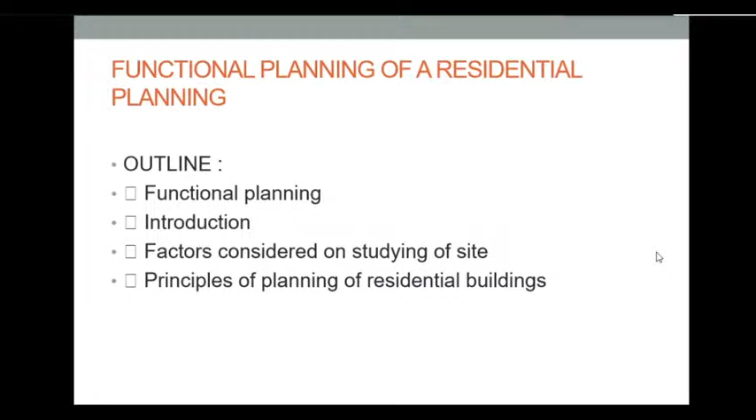So first it will be like a residential building. So first I'll give the functional planning of a residential building, what it covers, as an outline. So functional planning, introduction, factors considered on studying of site, principles of planning residential buildings. So these are the outlines of what we are going to cover today.

So first starting with functional planning, a prerequisite of any type of building. Planning imparts a good environment for living, working and recreation. So a well-planned, efficient and comfortable living environment is required for building up happy, healthy, beautiful, cheerful, peaceful lives. So we all must know how a residence plays an important role in each and everyone's life. It's a space where we rest and everything depends upon it. So our health, our happiness, everything is related to a residence.

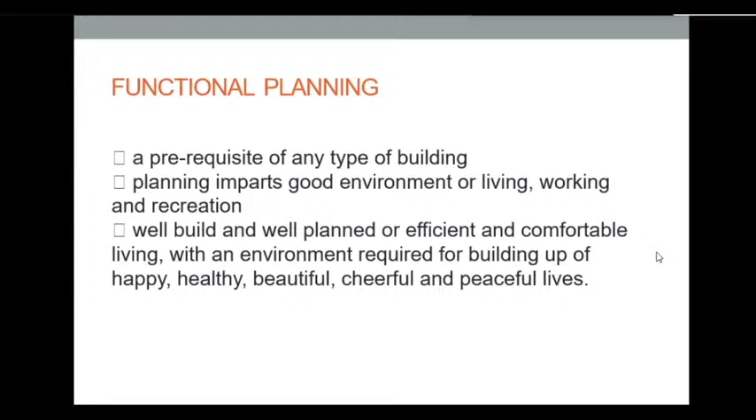So we'll see how planning concepts of a residential building play a very important role in all aspects of life. So first, introduction: planners keep the perspective of interior spaces for better results and economy. Moreover, it correlates the scientific factors of natural resources and Vastu Shastra. Vastu Shastra is to achieve mental and physical comforts of residents. The next thing is one must study the site before planning the site.

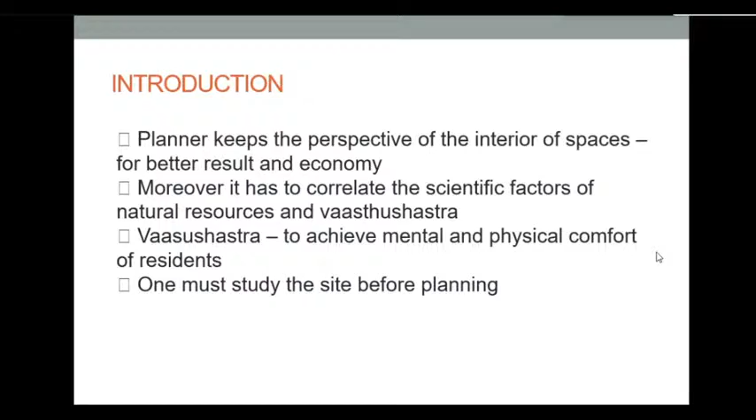Okay. So we'll have a general introduction about Vastu Shastra also. General introduction only, I'm not going deep, just a basic layout of Vastu Shastra so that you'll have a basic knowledge while planning a residence. Vastu Shastra is mainly dependent on your directions: north, south, west, and east. So you can see this is the basic of Vastu Shastra and the basic location of each and every space.

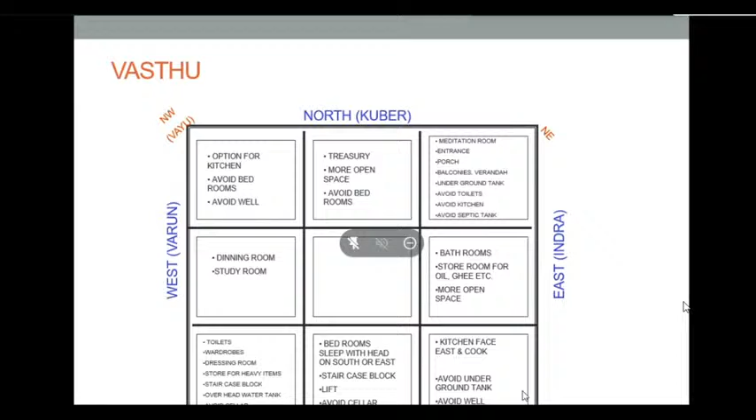Each individual will have a different opinion on Vastu Shastra. So according to me, Vastu Shastra is basically a scientific aspect. Based on the science, there are certain locations where certain spaces should be given. There's a reason behind why a particular space is given. So I'll give a few examples of why these spaces should be given.

Like the southeast corner should always be for the kitchen, and the southwest can be well utilized for a toilet. The reason is the wind direction. Based on the wind direction, southeast or northwest winds prevail in our South Indian context. So if you're cooking in the kitchen, the smoke can travel along with the wind. Or if your toilet is provided in the southwest, the smell can travel along with the wind itself.

So without avoiding your other two spaces, which are perfectly suitable for your resting spaces like bedroom and other lively spaces. Okay, so this is the basic example of Vastu Shastra, and I have given you the basic location of where each space could have been provided.

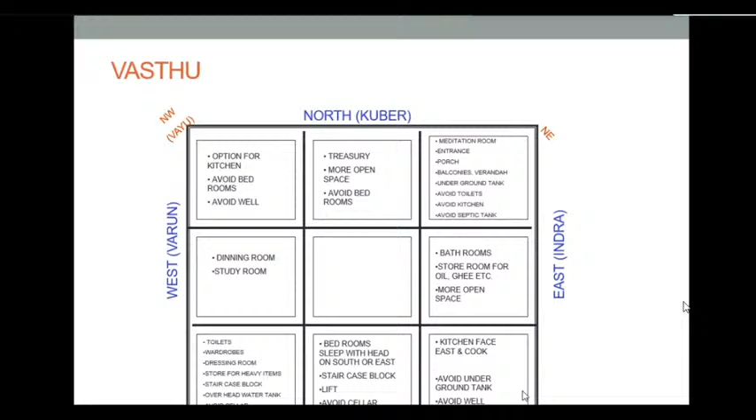So moving on to the next thing, layout of a site. So initially, while starting from a plan, we should always start from the site. So site is considered as the main example from where we should start. So we can say about what is a good site and what is a bad site. Depending upon this Vastu Shastra, also site has been located along with it.

So a good site indicates it should have a proper access and it should have proper neighborhood spaces. So corner sites are considered as good sites only if the location is perfectly suitable. For example, southeast corner site and northwest corner site can be considered, but the southwest corner site should be avoided because of the wind direction and wind pattern.

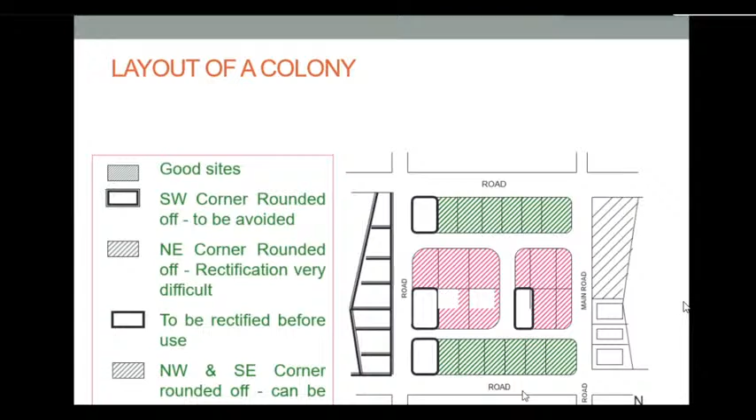Okay. So factors considered on studying of a site. So what you should consider while taking up the site is location of the site, study of the site with respect to the surrounding sites, study of geographical and geological conditions of the site, climatic conditions, survey map, average air direction, and network of road pattern. So these 7 points will be considered majorly when you talk about the site.

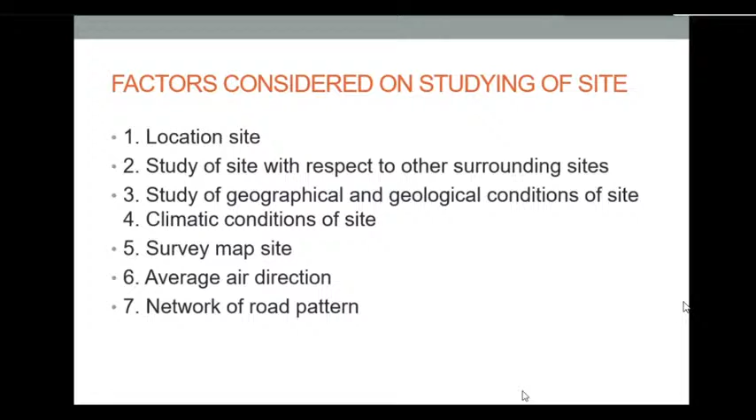The next 5 points: services available today, expected tomorrow. Like what are the services like water, drainage facilities, other things. Then environmental conditions. Is the site perfectly suitable for a residential building? For example, there may be many sites which are located on the outskirts of a city or in the midst of an industrial town or a commercial town, which, considering environmental aspects, are not considered good for a residential building.

Then the 10th point will be mode of transportation. So how well the site is connected through means of transportation. Nowadays, everyone is having a mode of transportation as vehicular transportation, 2-wheelers and 4-wheelers. But there are a few other conditions where common modes of transportation are also considered for accessing a site. So those modes of transportation have to be considered.

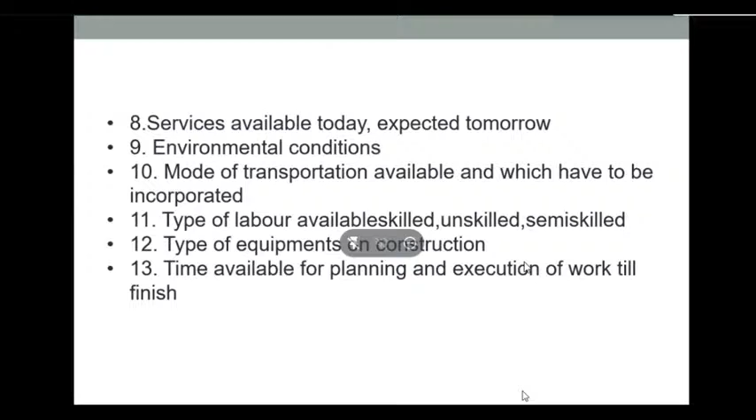Then next to transportation is about the types of labor available. So while you're talking about site, what types of labor are available? Skilled labor or unskilled labor or semi-skilled labor?

So next one is types of equipment for construction. So what equipment is available in the surrounding neighborhood? We have to take up the equipment to the site. How much distance we have to travel to take up the equipment? All these things are to be considered. Then the time available for planning and execution of work till finish. These things will come under project management, which is planning and execution of work.

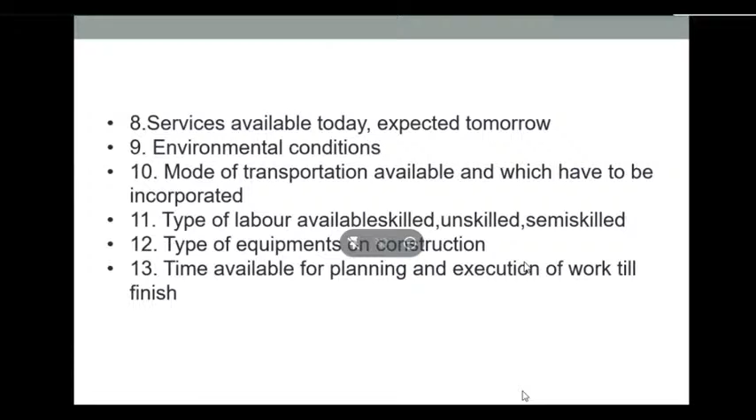So moving on to the next thing: form a circulation diagram to decide the forms of spaces. Form follows function to decide the various dimensions possible. Okay, so talking about the form of spaces, there are different spaces inside a residential building. For example, a kitchen space, a dining space, a living space, a bedroom space, a restroom space. All these are different kinds of interior spaces. So each space has been named on the function it follows.

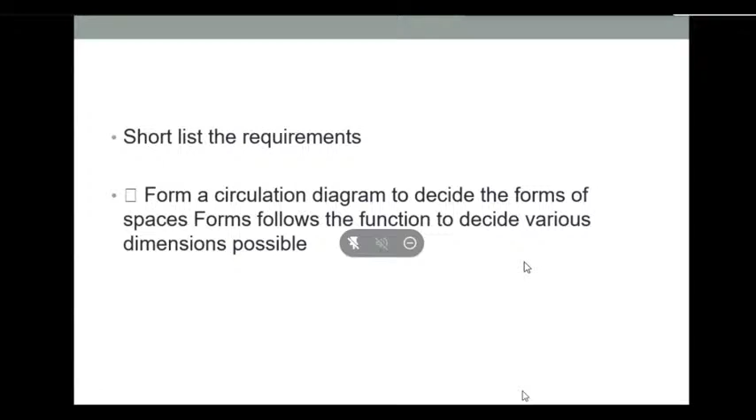So for example, a bedroom is for taking rest, a living room is for lively functions, a dining is for eating, and the kitchen is for cooking. So these are the functions on which the spaces have been designed. So based on this function only, a form of spaces has been followed. So first, we'll be evolving the planning using function. So evolution of bubble diagram to a finished floor plan.

Okay. So first we will be dividing the spaces into 3 zones. So what are the 3 zones? A private zone, a work zone, and a social zone. These are the 3 general zones of activities which will be happening inside a residential space. So what is the function beneath these 3 zones? The private zone will be your bedroom spaces, which will be occupied only by you and your close ones.

Then the workspace will be like a kitchen and dining or a family space. So it is where other people in your family will also be accessing the space, so it will be a semi-privatized space.

Then the third one comes to social spaces. That is your entry, garage, and living space, where third persons, other families or other persons can access, and they will be having an interaction with you. So those spaces are called social spaces. It is more of a non-private space, where other people can come in and have a discussion with you. So it depends upon each one's character and maybe each one's profession.

Then moving on, these aspects will be refined to show zones divided into their rooms and their relationship to one another. So now you can see how the rooms have been connected from each and every space. The third one is redrawn to show size and shape of rooms and traffic between them. Traffic is nothing but the circulation between them.

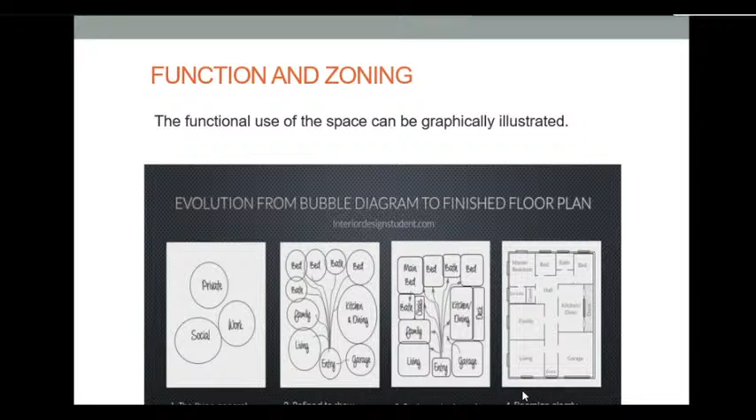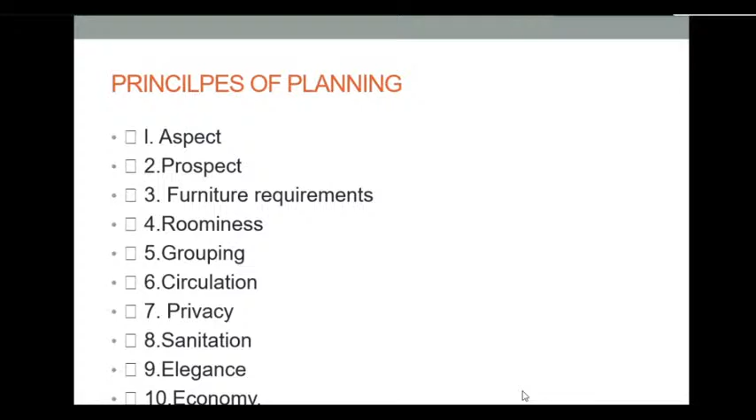Okay. So what are the principles of planning? There are 10 principles of planning, and we'll be seeing each and every principle. So the first principle will be aspect. Aspect means the arrangement of doors and windows in the external walls of the building, which allows the natural gifts of sunshine, air, and scenery.

So based on these aspects only, a space can be designed. An opening may be a door or window: where it is located, how well it is connected with nature, based on the wind movement and based on your sunlight, your space can be designed, and your openings can also be designed based on that. So that is the first thing, called aspect.

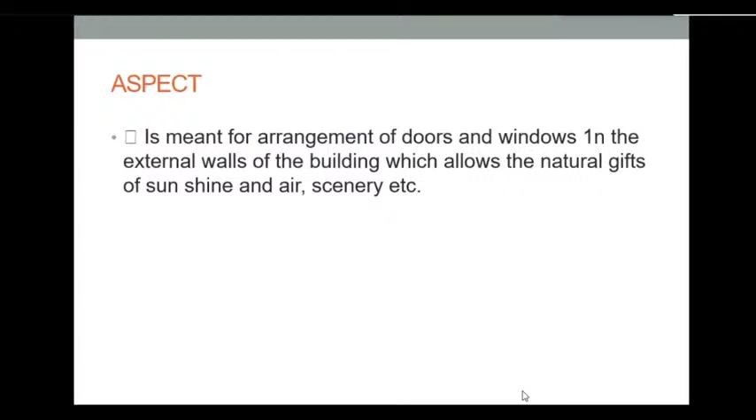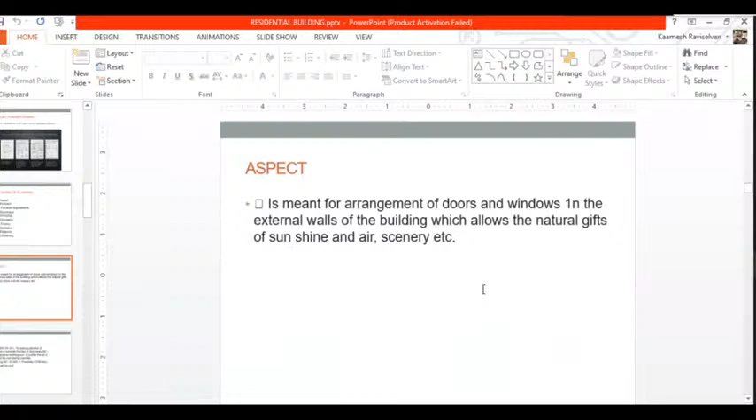So we'll start with the aspect. Aspect is like, considering your bedroom, I'll be explaining now. To receive plenty of breeze in summer, your bed can be placed in the northwest direction or west direction or southeast direction.

For your kitchen, to receive morning sun, which purifies the air, and it should be cool during the summer. So the dining room can be located in the southeast, south or southwest. For proximity to the kitchen, the dining should be placed adjacent to the kitchen as well.

Likewise, you can place your living room in the northwest, northeast or east direction, because it may receive morning sunlight. So it's good to have morning sunlight inside your living space rather than in your bedroom space or kitchen space.

The kitchen space will already be a hotter one. You may all very well know about the kitchen space; it will be a hotter one. So avoiding direct sunlight inside a kitchen will be very good for a person using the space.

So the next topic will be prospect. Prospect is determined by the views desired from certain rooms of the house and is influenced by the surrounding peculiarities of the selected site. So prospect is about how your projections and windows are located and how well they are refined from the outside perspective.

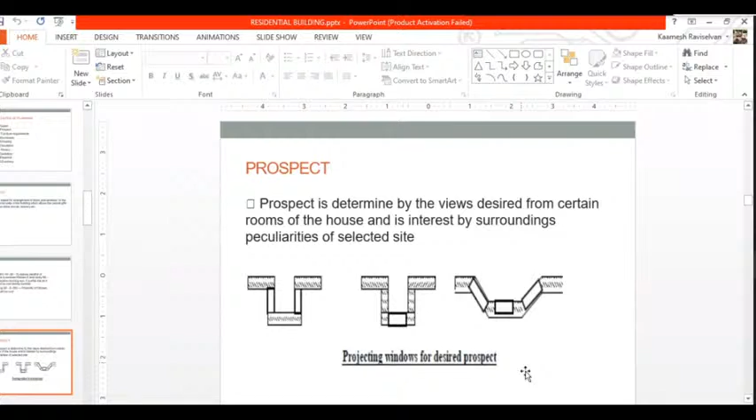So depending upon the function of the spaces, the window provisions may be given. And the third prospect will be, windows given on all three sides. So it will be good for a living space in the morning so that sunlight will enter from all three directions. Okay, so these are the things about prospect.

The next one is furniture requirements. The functional requirement of a room decides the required furniture. It is better to prepare a sketch indicating the position of furnitures, which helps position of doors, windows, circulation space, and size of the room.

So coming to the next point is after providing windows and doors - obviously we'll be providing a window and a door for a particular room. So considering the furniture requirement of the room, these provisions of windows could be transformed or changed based on user comfortability.

So for furniture requirements, I'll take an example. A living space will be considering sofas. Sofas will be placed inside a living space. Sofas can be of different types - L corner sofas, or 3-seater, or 2-seater, or single-seater. So basically we are taking a 3-seater and two single-seater sofas, and how the furniture has been placed based on the furniture placements.

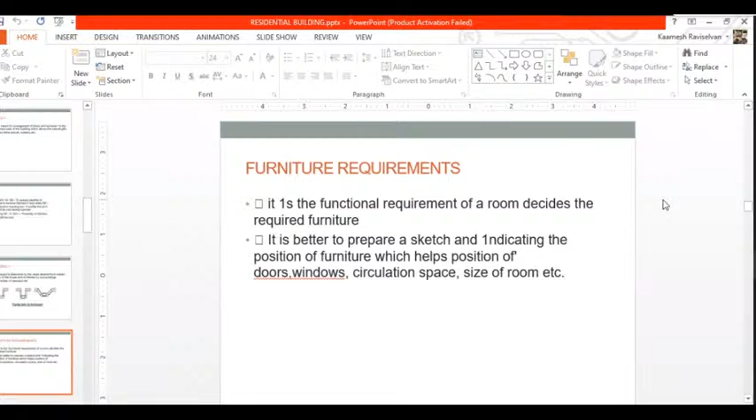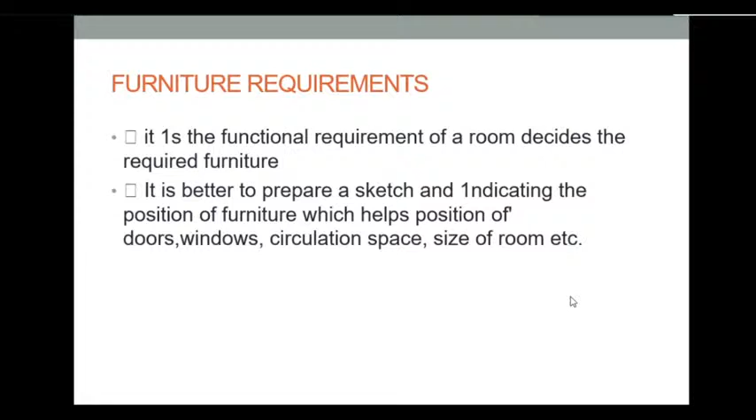So depending upon this furniture requirement, it's better to have the location of your opening spaces accordingly.

So moving to the next one is roominess. Roominess refers to the effect produced by deriving the maximum benefits from the minimum dimension of the room, giving due importance to the furniture placements in the room. Factors affecting the roominess are size of the room, shape of the room, furniture used, and position of doors and windows.

So first we'll explain what roominess is. Roominess is nothing but how the room has been designed or how the space has been designed. It could be a bigger space. For example, I can take a 16 feet by 16 feet bedroom, but placing in that bedroom, these factors - the shape, the furniture, and the position of doors and windows - will affect the roominess.

For example, if I'm taking a 16 feet by 16 feet room, and I'm providing only 2 windows of only 2 feet width on either walls, and providing bigger furniture - a bigger king size bed and also wardrobe spaces - these furnitures and the position of the windows will affect the roominess and make the room feel like a smaller space.

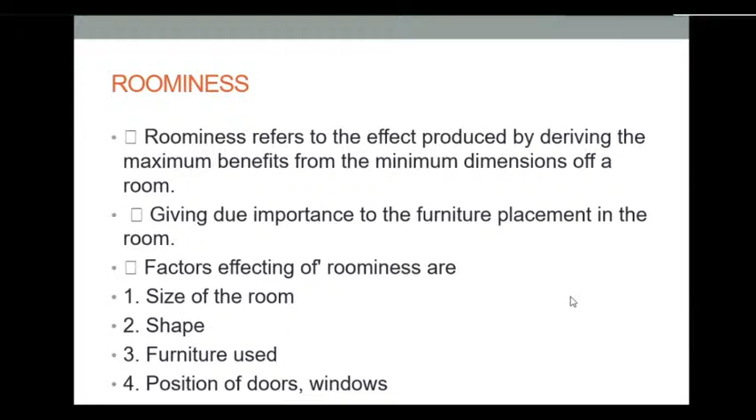But if you provide the same 16 feet by 16 feet room with a bigger window of 6 feet on one side and 4 feet on another side, with a queen size bed and small wardrobe spaces, the roominess will have more effect on the person using it - you will feel it as a more bigger space, even though it is the same size. So that's about the roominess.

Then grouping. Grouping consists in arranging the layout in a typical fashion so that all rooms are placed in proper correlation of their function in due proximity with each other. So grouping is nothing but how each function of the space is grouped together, and how the space has been arranged, and what is the relationship between one space and another space.

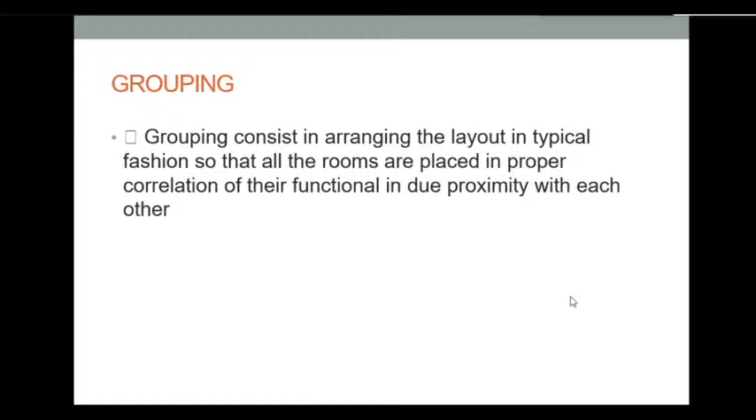For example, two bedrooms can be placed adjacent to each other. But a bedroom should not be placed adjacent to a home theater space, because the function of a home theater will be noisy, while a bedroom is a resting space.

So grouping is very important. This is how the grouping has been done. First, we are having a hall, and from the hall, what all things can be connected.

From the common room, you can access the hall. From the dining, you can access the hall. From the hall, you can access the guest room and toilet. From the foyer, you can access the common room, which is provided in between the foyer and the hall, also acting as a space.

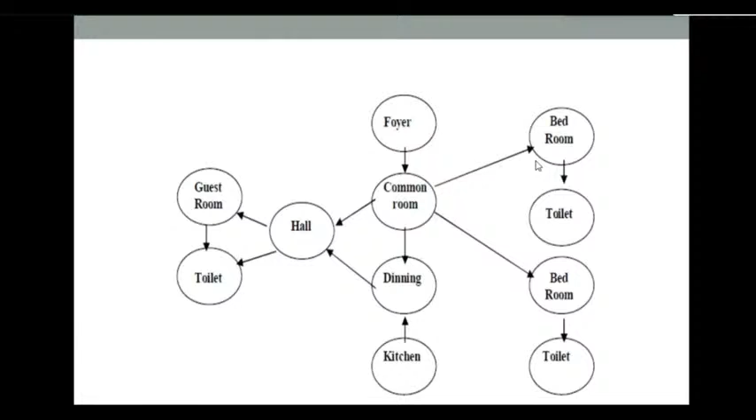We can call it an informal living space, while the hall is the formal living space. From that space we can access dining, and from dining we can access the kitchen. Other spaces like 2 bedrooms with attached toilets can be accessed from the common room itself.

Next comes circulation. Circulation is nothing but the movement of a user inside a space, and this movement is of 2 types: horizontal circulation and vertical circulation.

Horizontal circulation is, for a ground floor residential building, the movement of a person in the horizontal direction inside a space, from living to dining to kitchen, or kitchen to bedroom, or dining to bedroom and bedroom to toilet. These movements come under horizontal circulation.

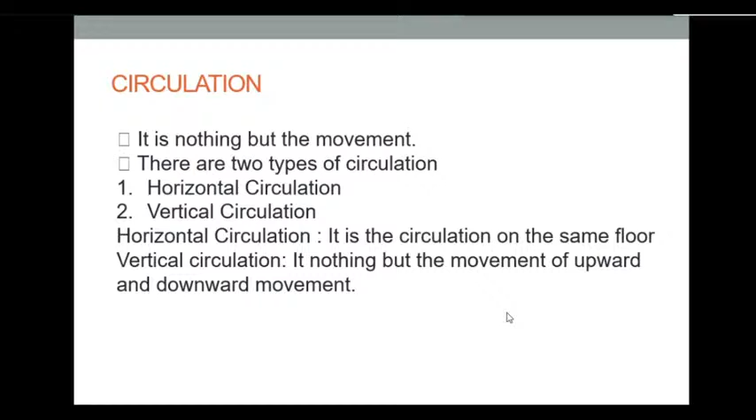When we talk about vertical circulation, we are talking about the staircase and moving to the top floor. How this connectivity happens is called vertical circulation. These are the 2 types of circulation we have to consider while planning a residence.

The next principle is privacy. Privacy is very important while planning a residential building. It's important in general buildings too, but for residential buildings it takes on much greater importance.

In terms of privacy, there are 2 types: internal privacy and external privacy. Internal privacy refers to your bedroom spaces and private spaces, where only 1 or 2 persons sharing the space can have access. That is your internal private space.

The next one is external privacy, which applies to your dining and living spaces where you use the space with your family circle. Others from outside your family circle should not have access - you should maintain privacy from them. That is the difference between internal privacy and external privacy.

The next aspect is ventilation. Good ventilation is an important factor in the comfortability of a building. Ventilation is the change of air inside a room, and a requirement of space and air is needed.

When we talk about ventilation, most people are using air conditioning right now, but using air conditioning is not very advisable all the time. In a few areas or at certain times of day, air conditioned space may be comfortable, but a well ventilated, naturally ventilated space will have a bigger impact than an air conditioned space.

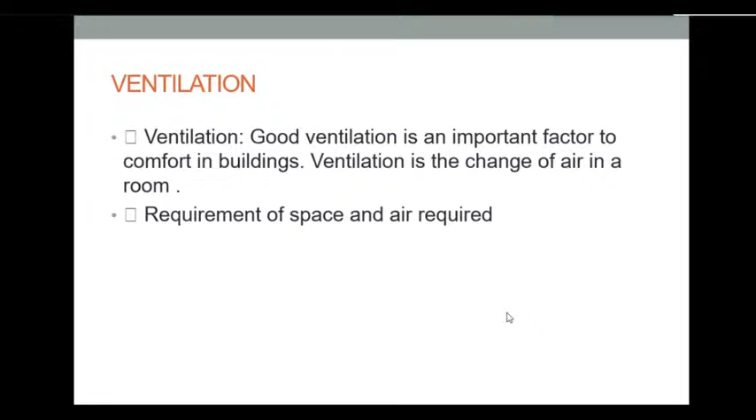So a space can be well ventilated, and the user would be very comfortable inside the building. That's about ventilation. The next one is sanitation - for sanitation, we must provide proper light and ventilation facilities for general cleaning and sanitary convenience.

To mention the hygienic condition of the building, light is of primary significance. Sunlight destroys and decreases germs.

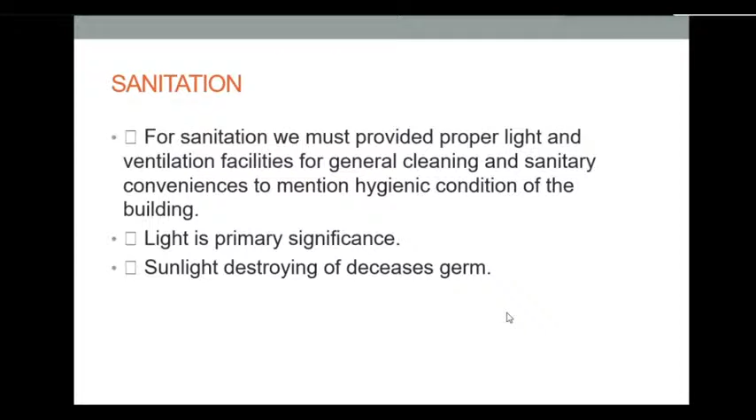So the first thing is how we will be providing sanitation. Sanitation is very important inside a building. If it is not properly maintained, it will create unhygienic conditions for the users. How good the sanitation you provide will help you sort out the service aspects, which you must have studied in detail in other sessions. This is just a basic principle to consider while planning.

Next we'll go deep inside the planning concepts. First is space planning. Two basic kinds of knowledge are needed to do space planning. First, knowing what things need to be included: partitions, rooms, furnishings, and accessories. Second, how to organize those things to achieve a functional and perceptually good solution.

First we have to consider where walls should come, acting as partitions, and how these walls can be defined to form a room. Four walls are created to form a particular room, and inside the room, furniture spaces and a few accessories could be provided. These elements combine to form the basics of planning.

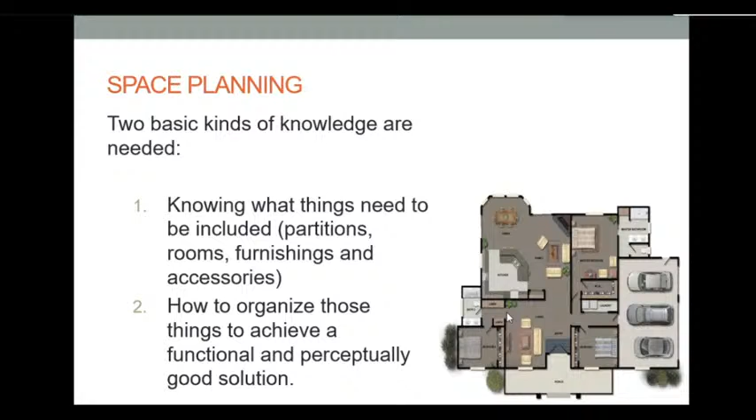With these elements in hand, we have to think about how to organize them - where to use them, where to furnish, where to give a wall, and how this wall could function. All these things come under spatial planning.

This can be changed based on the construction site while doing the construction itself. Depending upon the spaces, the position of doors and windows can be shifted and changed. This is a partially changeable element.

Then furnishings and lighting equipment - these things can be changed whenever you want, based on your needs. Inside a space, furnishing elements can be changed at whatever time you want, however comfortable you want it.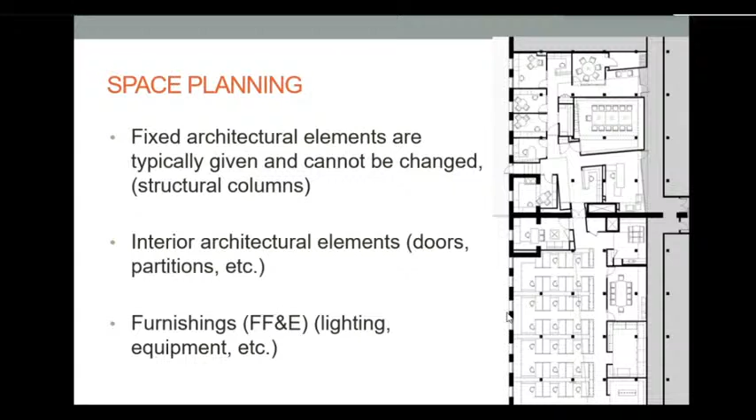So, the anatomy of a space plan. We'll look into each space and how the anatomy is provided. Producing a good plan is not an easy task; it requires trial and error with many refinements. When asking someone what they see, they will state the obvious, like kitchen size, but designers note things such as efficiency, flow, correct placement of rooms, shape of rooms, etc.

So designing a basic layout of a plan is not very easy, but also not very difficult. A person can learn about the function of a space, and depending upon that function, each room can be planned and designed. For example, with a living room, the first point when designing is how many people are using the room.

This is about a small house - I'm explaining an example and will show how the planning of this house has been done. First, the living space: how many persons are using it? For example, this living space is used by 4 persons, so for 4-person usage, the living space has been designed at this size. The size and shape are also very important when considering a living room.

Then comes the dining space. For 4 persons, how much dining space should there be? A 4-seater table should be properly placed, and apart from that, circulation behind the table should also be sufficient for a person to move out.

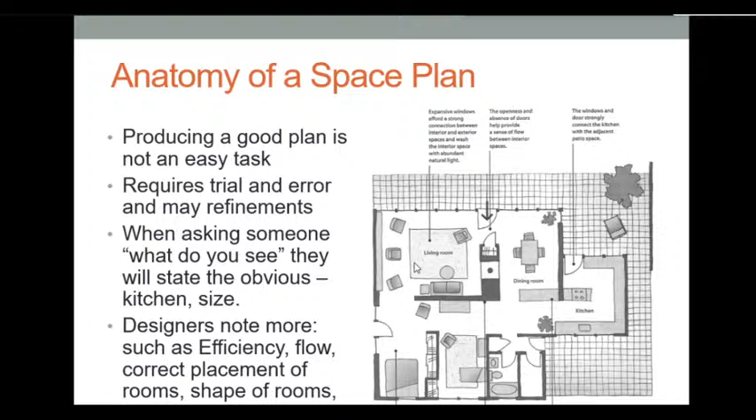Then the kitchen space should be enough, more than sufficient for a person to cook for 4 people. Apart from that, 2 bedroom spaces - one bedroom can be occupied by 2 people. Such a bedroom space, and according to that, restroom spaces can also be provided. This is the anatomy of a space plan - how, based on the number of users and the size of the family, a space can be designed.

So what is a good room? Or how can we say that this space is very good and the space has been effectively planned? Based on 5 topics, a room can be judged as a good room. So what are those things? First is the envelope, then contents, connection, flow, and scale. So we'll see what these 5 topics, the 5 principles of room design, are.

Okay, into a room. Having talked about the entire residence, we'll now go to a particular room. Inside a particular room, these 5 topics are very, very important: envelope, contents, connections, flow, and scale. Talking about the envelope, a spatial envelope is functional and comfortable. It is the right size and a good shape and proportion.

So envelope is nothing but how the room has been covered. For example, in our scenarios, the room has been covered with 4 walls. So how these 4 walls have been located, how they define the shape of the room, and how the shape of the room will give you proper functional attainment of a space.

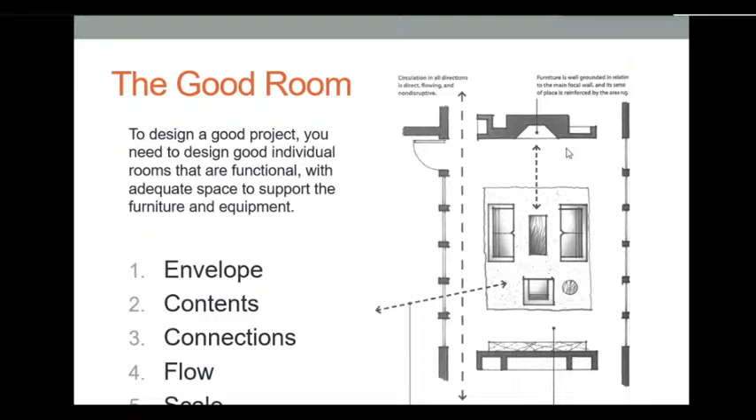So moving from envelope, the next one is contents. The contents are the furnishing equipment and accessories placed inside the room. When we talk about furnishing equipment, it's not only sofas; there is other furnishing equipment also, like side tables, TV units, library spaces, etc. If you talk about a bedroom, there will be a cot and a side table, etc. So all these furnishing equipments together form the point of content.

The next one is connections. Connection is how well the room is connected to other rooms. Okay, so we have a dining space in between. If a dining space is connected to a kitchen, it's well and good. That's how a space should be designed. We can't place a common room or a bedroom in between a dining room and a kitchen, right? So the connection between these 2 spaces is very, very important.

Same way, the dining can be connected to a bedroom as well. A living room can also be connected to a bedroom. So the connection is very, very important for particular rooms.

Then the next one is flow. Flow is nothing but the way you use the room and the way you walk around the room. If you take the example of a bedroom space, there will be a bed located. Apart from the bed, we can have wardrobe spaces, dressing spaces, TV unit spaces, or a small study unit space inside a bedroom. So these few things are inside a bedroom space.

So apart from that, how well you are using the space, how well your flow or circulation inside the space is. Is it comfortable for you to use the space inside? If you place a bed or a cot in the middle of the room and allow a person to move all around the cot, it will be very, very difficult to use the space. You'll always be running around the cot. So it's good that the cot is connected to one wall, and space circulation should be very effectively planned.

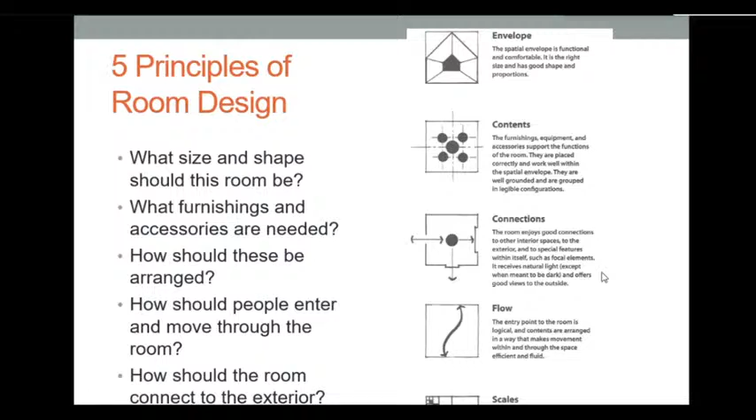So shape and proportion. So we talked about the initial thing. So shape and proportion, how the shape and proportion should be. So these are the different ratios of shapes: circular, square. Square is 1:1 ratio. Diagonal of square 1:1.4 ratio. Square plus third 3:4 ratio. Square plus half 2:3 ratio. Square plus 2/3 3:5 ratio, or double square 1:2 ratio.

So depending upon these aspects, we will be planning the shape and proportion of a room. Not many shapes and proportions will produce a good room. Rectangular rooms are most common. Avoid long and narrow rooms. If the length of the room greatly exceeds its width, the proportion becomes uncomfortably narrow. For example, we will be avoiding a double square, because the room will become too narrow and it will be very hard for you to use. So maximum we can go till square plus 2/3, and it's better to avoid a double square.

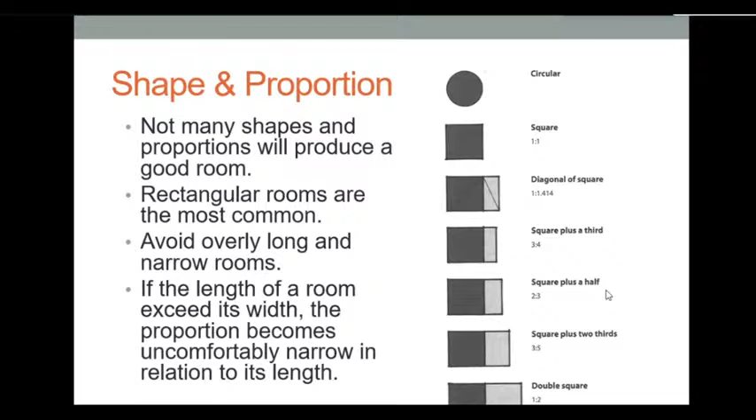So if the width of the room is 10 feet, the length of the room should be less than 20 feet. Okay, it shouldn't go till 20 feet itself. Double the length will make the room very narrow. So square plus half, that is 2:3 ratio, is a perfect rectangle that can be used for a room. Circular rooms can be used. Circular rooms help in giving a space a bigger feel, more area, but there are lots of negative aspects to a circular space in terms of structural elements, placing of columns, doors, etc.

So next one is provision of windows. We'll see how to provide a window. Always consider the windows when placing your furniture. They provide views and natural lighting, but can also cause glare, too much heat, or a bad view. Decide on a case by case basis. So these are 5 different examples I have provided. The first one: placement of a bed and a desk by the window offers a direct relationship with the exterior.

So when you place a bed, it's very good to place a window on the side of the bed rather than at the head side or the front side, so that after lying in the bed, you have a view. But one more important thing is to avoid direct impact of natural light inside the bed space. Nowadays we are using curtains, so it's not a big issue, but when we are designing, it's a smaller issue to consider.

So the next one is living space. I have provided 3 examples for living space. The first is providing a bigger window on the sides of the space. The second one is providing a corner window, and this one is providing a window directly opposite to the seating space. So we won't be going with the fourth one. We'll be going with the second one or the third one mostly.

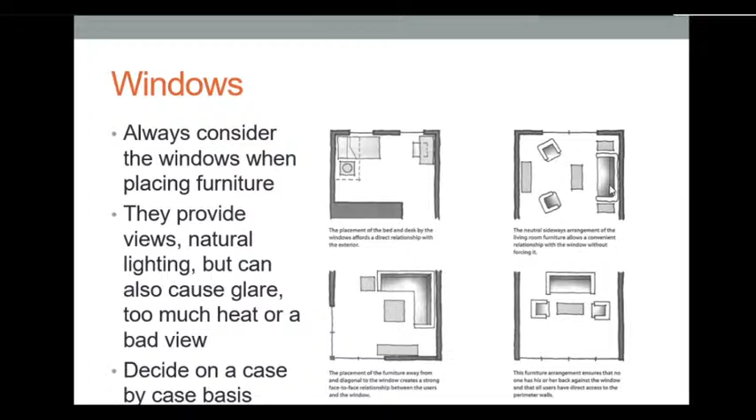In the Indian context and the modern day context, we are mostly going with the second one. Why? Directly opposite to the seating space we'll be having a TV unit, so it's good to have a visual effect for the TV unit. On the sides, we'll have the window, and try to provide the seating like this, because the reflection of your opening will always be seen in the TV. In these spaces, the reflection is more on the sideways, so when you're sitting straight in front of the TV, the reflection is not much.

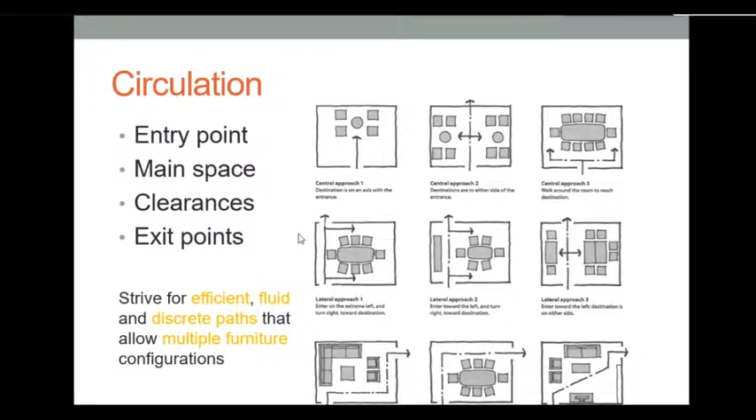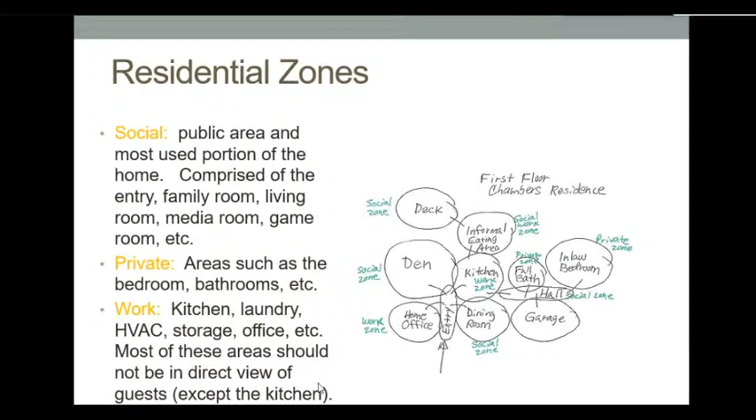So the next one is residential zones, like we discussed in the beginning. Social, private, and workspaces. Your public area, entry, family room, living room, media room, game room, etc. will come under social spaces. Your private rooms, private areas such as bedroom and bathrooms, etc. Workspace such as kitchen, laundry, storage, office space. Most of this area should not be in direct view of the guest except kitchen. Okay, so this is how the zones have been divided.

So evaluating the plan. So traffic patterns, how do you move from room to room? So this is how we will be considering a traffic pattern, how we will be moving from one room to another room. Is the traffic flow through the conversation areas? Is the traffic flow through a meal preparation area? Is the traffic flow through a private area? Is there a good flow from service entrances? So these things should be considered.

For example, moving from one room to another room, you shouldn't make the person move through a conversational area. A conversation area is like a living space, or a small family living space is also a conversation area, where two people will sit and calmly have a discussion on something. During those conversations, if you have a movement inside the space, it will be very uncomfortable for a person to have a conversation. So conversation areas shouldn't be interrupted.

The next one is meal preparation area. Traffic flow shouldn't be through a meal preparation area. The meal preparation area, obviously it will be adjacent to your kitchen space. So what they meant to say is your traffic shouldn't be through kitchen space. Okay, then a proper connectivity from the service entrances.

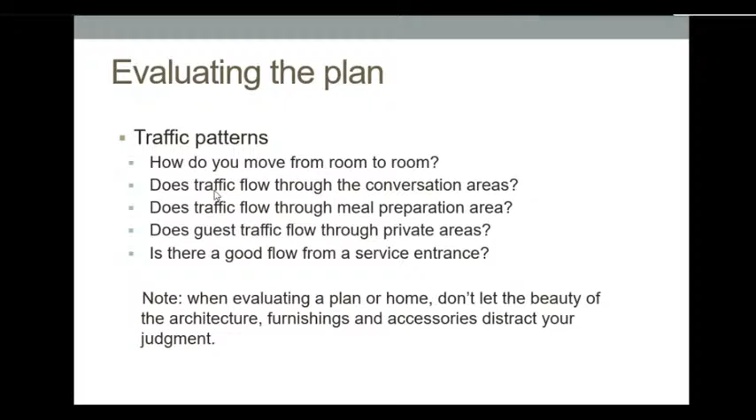Okay, then there is a note: when evaluating a plan or a home, don't let the beauty of architecture, furniture, and accessories distract your judgment. Okay, so furniture and accessories can be changed. Don't design a space based on your furniture and accessories. Design a space, then after that, furniture or accessories can be incorporated for the particular space.

Okay, then the next one is look for poorly located doors, windows, and closets. Are they conveniently located, or do they interfere with good furniture arrangements and traffic patterns? Is there adequate storage space inside and out? Is the plan effectively oriented on the site? The climate controls, privacy and views, garage door openings to the side. Look for adjacencies of rooms. Do they function in relationship to each other? Is the space appropriately allocated? So all these things we have to consider while evaluating a plan.

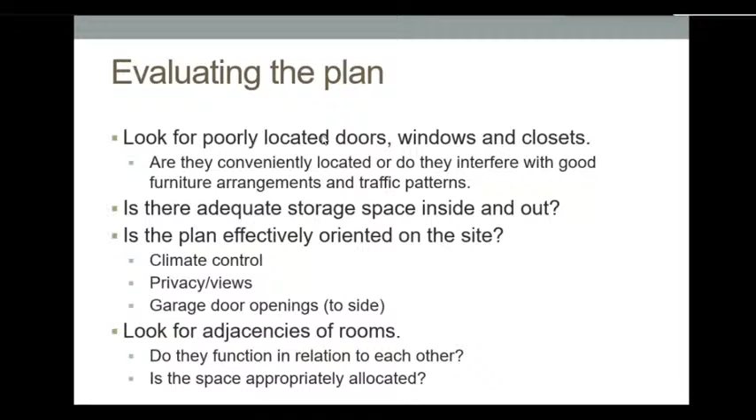So how well have the doors and windows been provided? Is it a well ventilated space? Is the door provided properly? Accessibility is that the entry point and exit point are located based on your design. How well has it been designed? Is it very easy to access from one space to another space, or are the window provisions good for a particular ventilated space? All these things we have to consider while evaluating a plan. Then common traffic considerations.

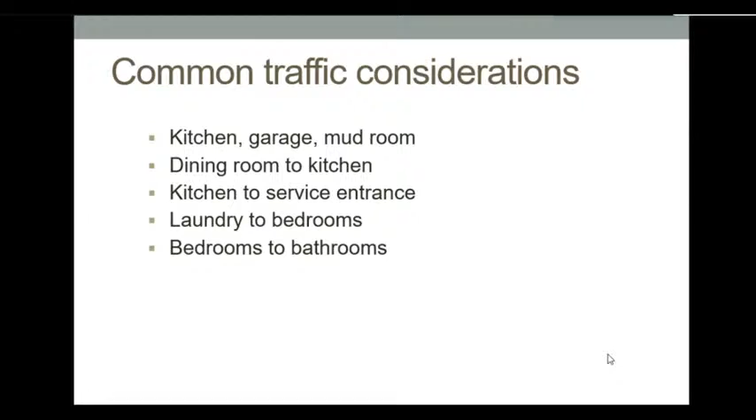Common traffic considerations: kitchen, garage, mudroom; dining room to kitchen, kitchen to service entrances, laundry to bedrooms, bedrooms to bathrooms. So these are the common traffic considerations that should be addressed while talking about the plan. Now we'll talk about consideration by area.

Okay, so how the entrance should be provided. The entrance should have no direct view into your private zones or work zones from the entry. It should have a coat closet. A coat closet is nothing but a place for hanging up clothes or keeping other accessories. It should not open directly into the living area. So that's why we'll be having a foyer space. Your entry should always have a foyer space.

What is the necessity of a foyer space? You shouldn't directly enter into your living space. So a person should enter into your foyer space, and from the foyer space enter into your living space. Approximately 35 square feet will be enough for the provision of your foyer space or entry space. Ability to view visitors and the lighting.

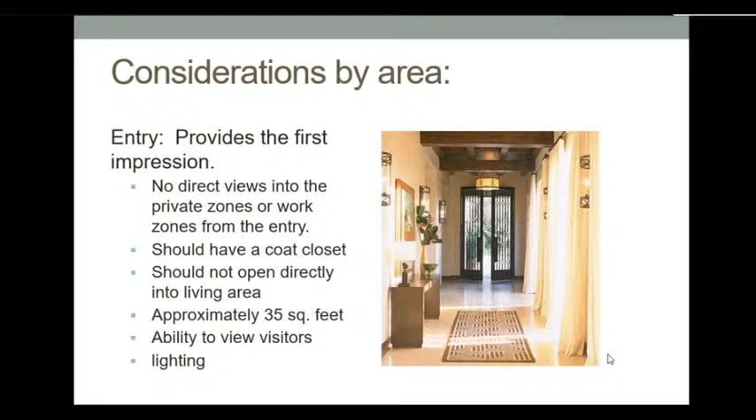So what are the foyer space functions? The ability of a person to view who has arrived at your main door. You'll be standing in the foyer space and you'll be looking outside. And the lighting of the space shouldn't be diminished. It should also be checked.

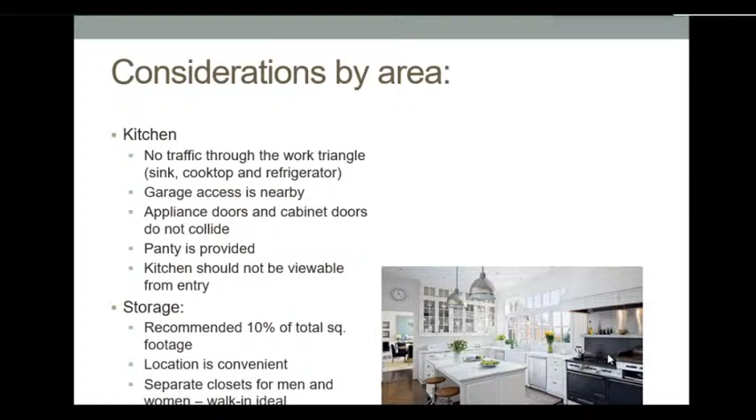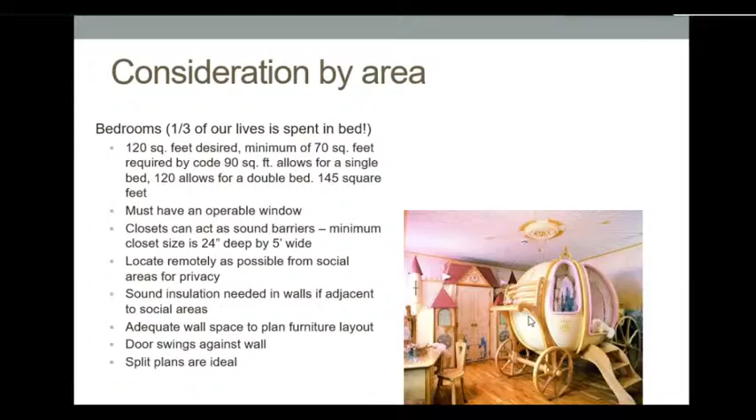Then the bathroom is divided into 3 types of areas: dry area, semi-wet area, wet area. Dry area is your wash basin. Semi-wet area is your WC, that is your water closet. Then the wet area will be your shower area. These 3 things have been divided. So initially you can't enter directly into your wet area or semi-wet area. We'll be entering into your dry area, that is your wash basin, first. Then we'll be moving on along with the functional needs.

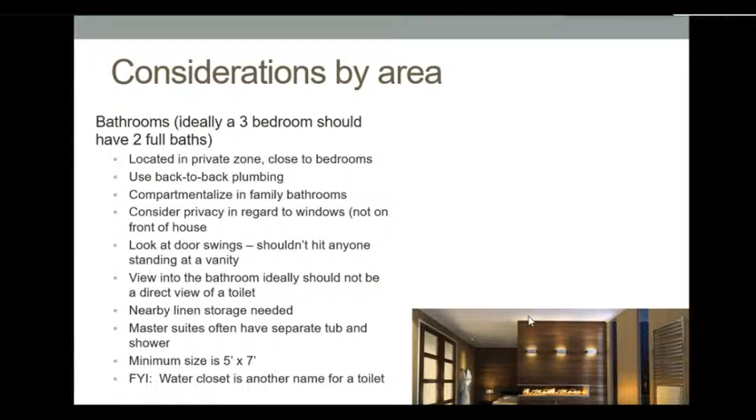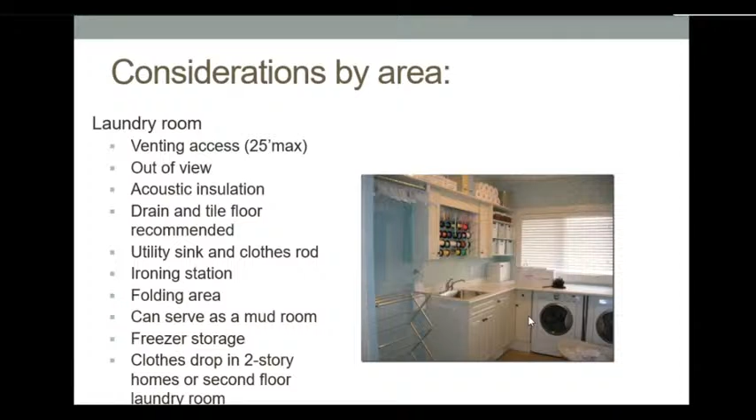So the next one is about floor plans. There are 2 things: open plans and closed plans. So I'll explain open plans and closed plans for you. So an open plan is nothing but a lot of space. It's like a studio space. It is actually less expensive. It's a concept developed by an architect called Frank Lloyd Wright.

It is less expensive to build. Space seems very larger, with flexible layouts ideal for access. The disadvantage is lack of privacy and lack of sound insulation.

So for example, if you see here, this plan, you will be having an entrance. This is your living space. This is your kitchen space. This is your dining space. This is your workspace. So everything together is open into a single space, all the functions put together.

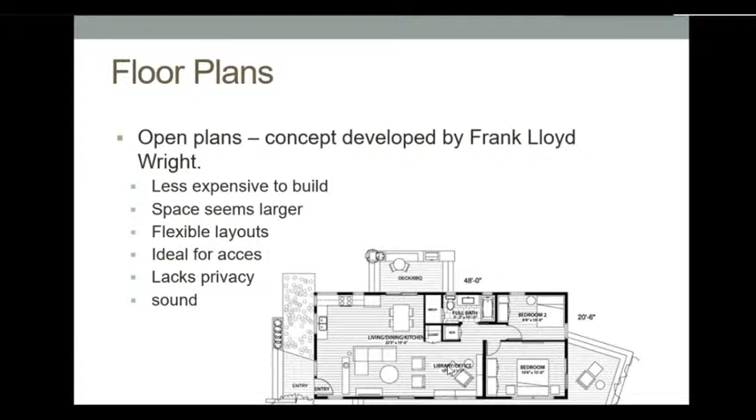This is a flexible layout which reduces your cost of constructing the walls and allows one to have a bigger space, or look like a bigger room. But its lack of privacy will be there, and the sound will be very hard for many persons to use. So this is an open plan.

So closed plan is what we are considering nowadays in our Indian context. It's walled and has doors, provides more privacy, creates chopped up plans, can control HVAC to areas not often used, is not easily accessible, and less flexible for furniture layouts. Apart from that, this is the more comfortable one we are using.

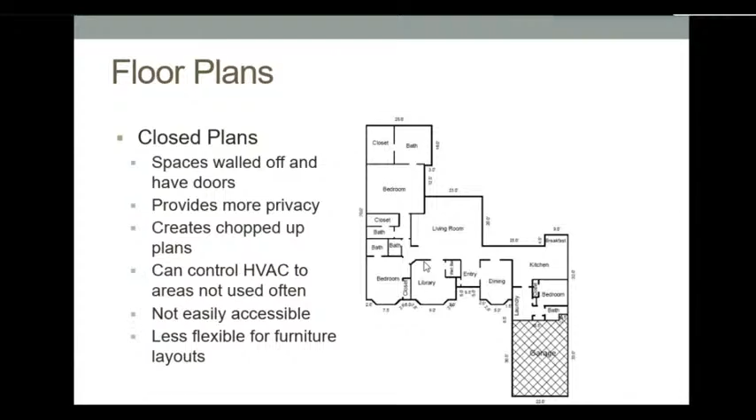Thank you guys. With this, I'm ending the session on how to plan out a residential layout. If you have any queries or doubts, you can proceed. We'll be clarifying your doubts and queries.

Yes sir, we have questions from the student side. The first question is whether cross ventilation is good or diagonal ventilation is better. Which one is good?

So cross ventilation is good. Once again, moving to the ventilation aspect, we need to learn about the wind direction of a space. Depending on the wind direction and the provision of rooms, ventilation aspects can be considered. If placing a bedroom in a proper corner space, cross ventilation will be very effective. Diagonal ventilation will also be suitable if placed in a perfectly corner space, or if you can't get a corner space for a particular function.

In those aspects, providing cross ventilation will be very much suitable. But a space without cross ventilation or diagonal ventilation will be very uncomfortable for a person to use.

Okay, the next question from Giri: how do we take all these policies into consideration when planning small houses? What are the ones that can be ignored under such constraints?